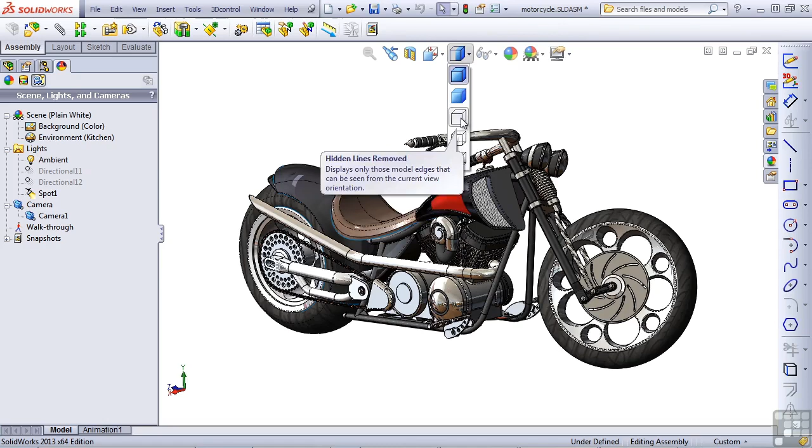You'll remember I've said that I most frequently work with shaded with edges turned on. Shaded without edges turns out to be the fastest display mode, and the wireframe options are slower than shaded.

Notice that some of the models have colored wireframe display while the majority are just black. If we open up one particular part and look at it, you can go through the Tools Options dialog. Under Document Properties, go to Model Display. Notice that this part does not have the Apply Same Color to Wireframe, HLR, and Shaded turned on. So we'll turn that on now and say OK, and flip back to the assembly.

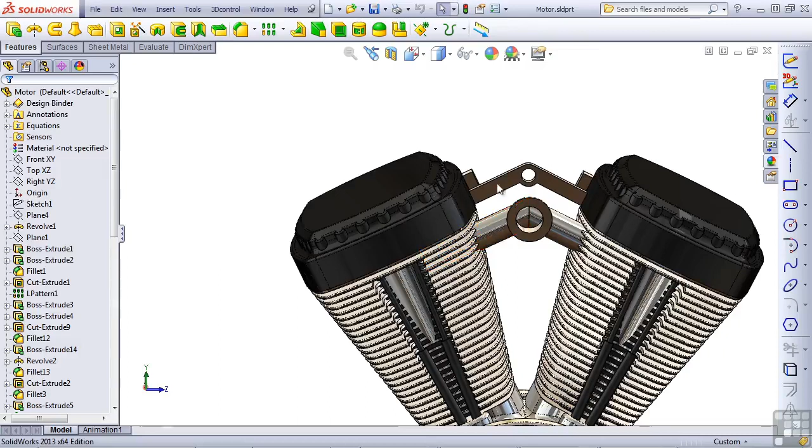Now that was set to a white color. Let's open up the motor to see how that is set up. So we'll go to Tools Options, Document Properties, Model Display, and this has a specific color set for wireframe. If we apply the same color, then the model turns out gray.

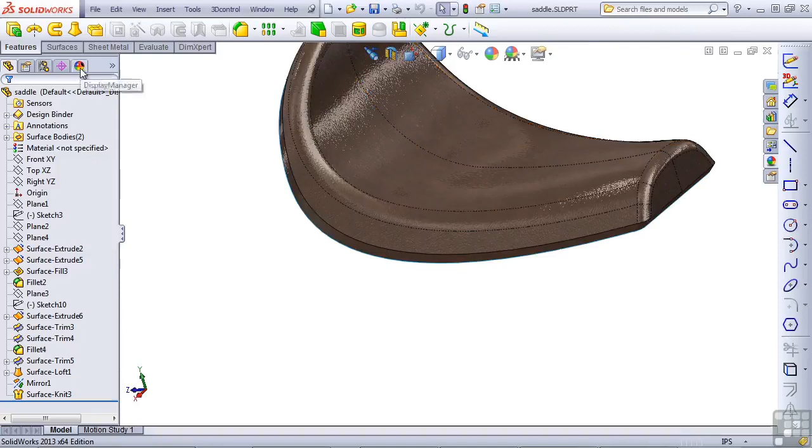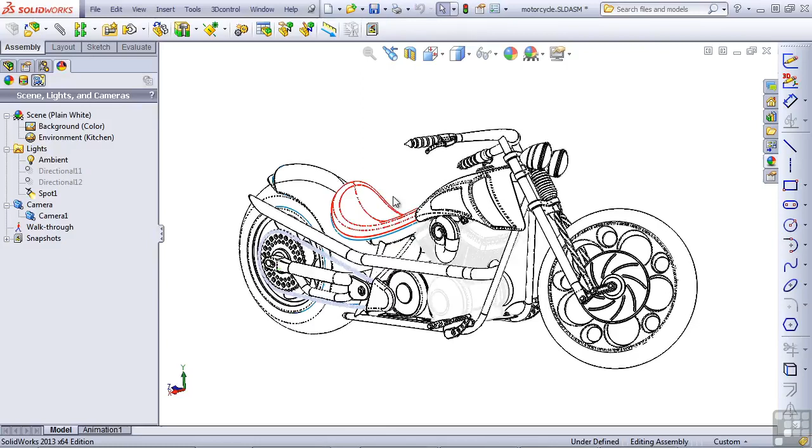Let's change the color of the seat, even though it has a material on it. If you have an image mapped to the material as a part of the appearance, as this has had a leather grain associated with it, then the color is disabled, and re-enabling the color will override that leather grain image. Now we flip back to the assembly, and the seat should display as red.

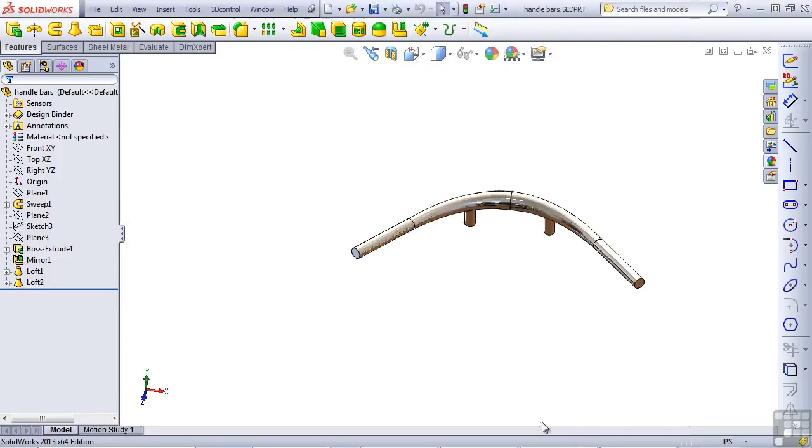This setting, if we look at the handlebars, at the same setting, the Tools Options, Document Properties, Model Display, Apply Same Color to Wireframe, HLR, and Shaded. This setting can be set for templates. And in fact, it's probably the best option when it is set to templates, because then your assemblies in wireframe, all of the parts will be distinguishable from one another.

If that setting is not set in your template, then you will get what I've got here for most of my parts, which is simple black wireframe, regardless of the shaded color of the part.

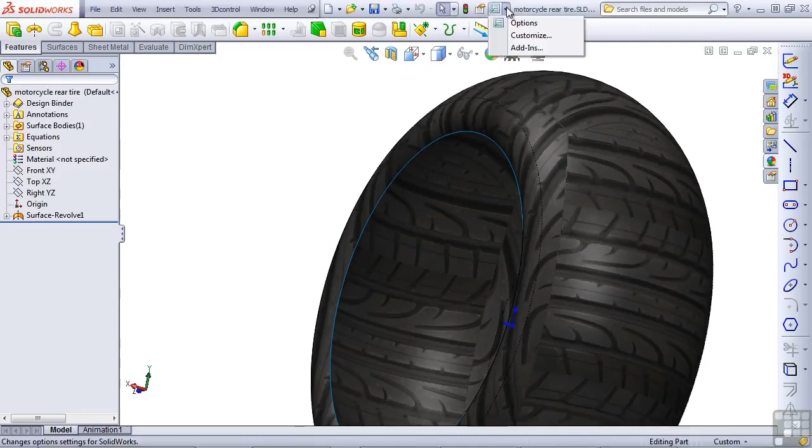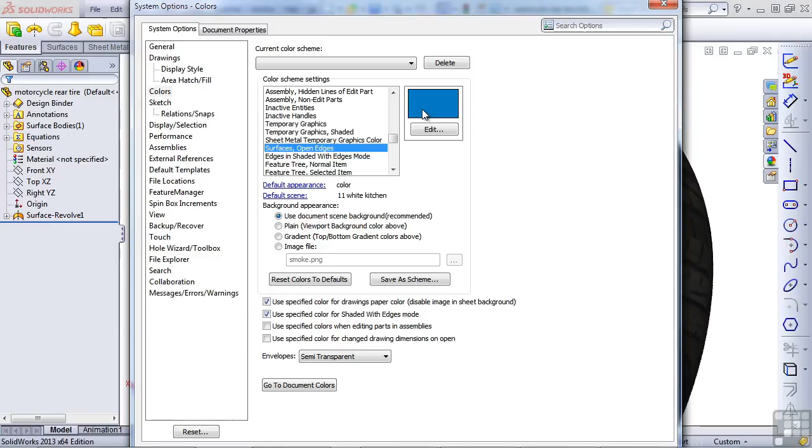Notice that some of these parts are showing blue, but that's for a different reason. If I open up the rear tire part, you can see that this is just a surface that's been revolved. And there's an option in SOLIDWORKS under Display Selection that will show the open edges of surfaces in a different color. That color is set in your Colors dialog, Surfaces, Open Edges. It's a good idea to set this as a bright color, especially if you're working with surfaces very often, because open edges in a surface body can cause a lot of difficulties.

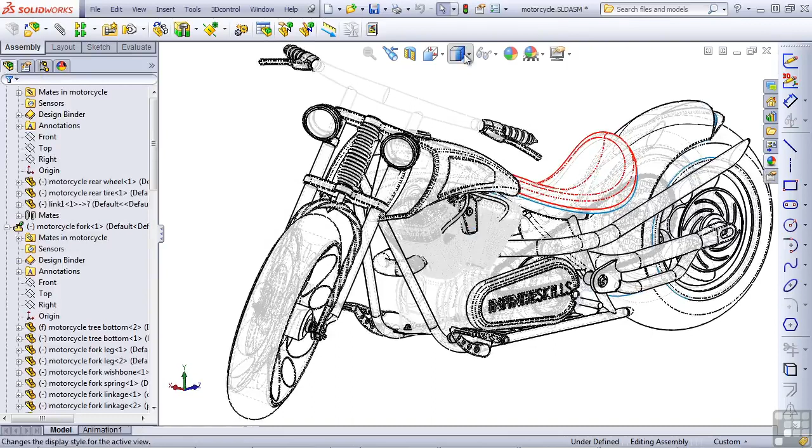In addition to straight wireframe, one of my favorites is hidden lines visible, but on an assembly like this, it makes the display rather busy. So one of the things I like to do is set my overall to shaded with edges, and then use the display pane to change the display of various other parts.

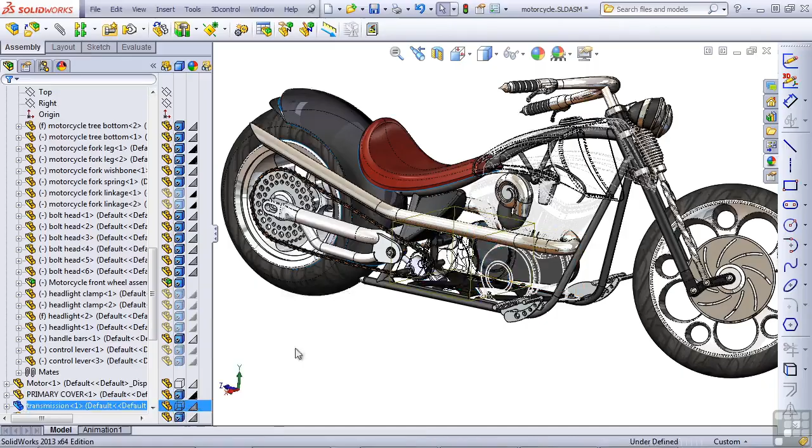For example, the gas tank can be set to hidden lines visible. The motor can be set to hidden lines removed. The transmission can be set to straight wireframe. This enables you to get a good see-through look at your part. You can mix modes as well, so your primary cover you could set to transparent.

Notice as I'm doing this, the video card is struggling more and more to keep up. As I'm rotating, some of these parts are getting tessellated, which is what it defaults to when it just can't keep up with how fast the display needs to run.